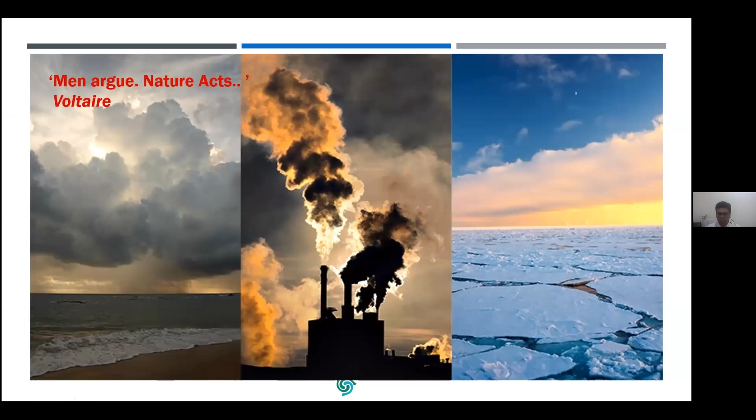But still, we are just discussing what kind of mitigation measures we should take. Individually or nationwide, separately, everyone is discussing this and proposing some action plan. But to mitigate these issues, we have to act together. We all know through different Conference of Parties like the Paris Agreement, or COP26 and COP27 last year, we are basically discussing globally what kind of mitigation measures we should have.

As displayed over here, we are facing many different issues like water scarcity and drought situations. And among them, waste management is also one of the major issues which we are facing right now.

So just to give you a basic idea about the carbon footprint, because we are talking about net zero now, net zero carbon: overall, India's contribution to carbon emissions globally is around 7.5%, which is a significant amount, and it is continuously increasing. So we have to act towards it.

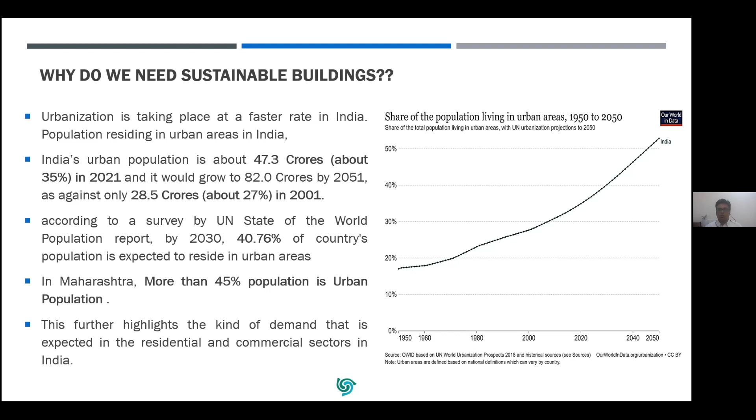The way population is growing, the way migration is happening from rural to urban areas, obviously we have to meet all the aspirations, meet the lifestyle standards, mitigate poverty, create employment, but at the same time it should be responsible. So even city growth or new buildings should be responsible.

Again, when we talk about buildings, many times we think of buildings in isolation, as very small buildings. Typically what happens is most stakeholders argue that we don't have a huge impact on the environment, or we are not creating a huge amount of waste or pollution. But with the sheer volume of the number of buildings and the population residing in them, and projects like commercial, different types of commercial, institutional, healthcare, or many different typologies of buildings, in volume the impact is huge.

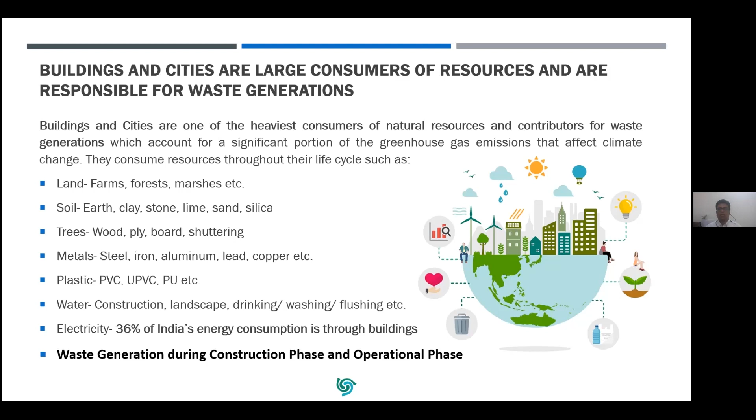So buildings are basically continuously consuming resources. They are depleting resources during the construction phase and during the operation phase also. They consume land, they consume different types of materials like metals, soils, plastics, you name it - every material any building is consuming. At the same time, during construction and post-occupancy, in the operational phase, it is continuously using or consuming resources like water and electricity. During construction and operation, it is also creating a huge amount of waste, which is actually today's point of discussion. So we have to consider waste generation during both the construction phase and the operational phase.

As per the CPCB report, every year they present a report about what kind of waste India generates. As per CPCB 2020-21, the total quantity of solid waste generated in the country is somewhere around 1,60,000 tons per day, out of which 1,52,000 tons per day is being collected, which is an efficiency of 95%. But if you check the percent treated, only 50% is being treated, and almost 18% is going to the landfill. The gap is that 31% of the total waste generated remains unaccounted for. So we are only treating 50%, 18% is going anyway to the landfill, and 31% we don't know what is happening to that waste. It is a huge amount of municipal solid waste generated.

Also, most of the time what happens is we only talk about municipal solid waste generated. Obviously that is a major concern, but then we typically ignore the construction and demolition waste. The way the construction industry is growing, the way population is growing, and the requirement for houses and different types of buildings is growing, there is a huge increment in construction and demolition waste.

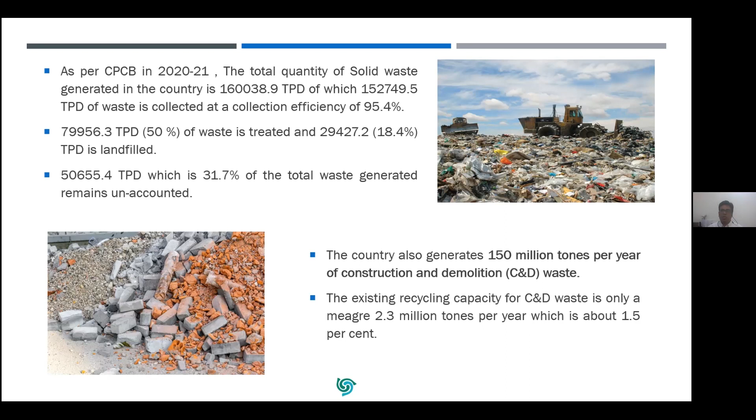There are a few research papers and other statistics available. The country generates almost 150 million tons per year of construction and demolition waste, and only about 1.5% - I'm considering this on the positive side, but as per many research papers it is only 0.5 to 1% - of the total construction and demolition waste generated is being treated or recycled. All the other waste is going to the landfills. It is polluting the farms, it is polluting the rivers, it is polluting the air and many other resources. So we need to think about this waste also.

Is there any existing legal framework related to waste management? Yes, there are many rules and regulations related to waste management. There's the Plastic Waste Management Rules from 2016. From the Environmental Protection Act or Air Act, there are rules related to waste management, but we also have different specific rules related to plastic, batteries, e-waste, hazardous waste. Even for construction and demolition waste, there are rules from 2016, and biomedical waste management. Now we even have rules regarding wastewater, how you should treat it.

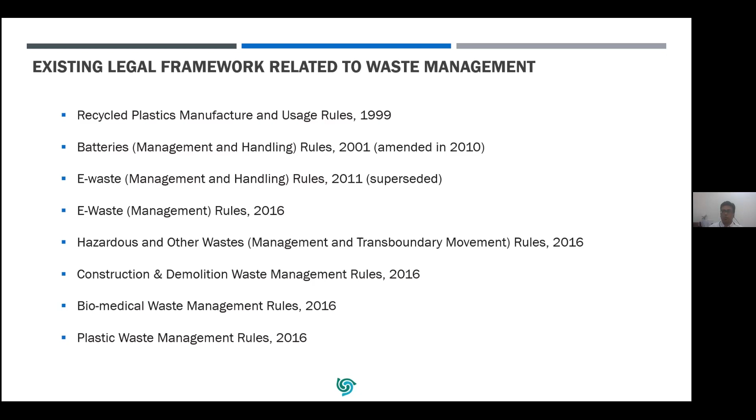So there are legal frameworks available, but the problem is with implementation and awareness. The existing legal framework is already there, but we have to implement it properly and monitor it properly. In this regard, green buildings play a major role.

So what is a green building? In simple language, a green building is one which uses less water and less energy. Green buildings don't say that you should compromise on your aspirations, or compromise on your thermal comfort, visual comfort, or other comfort conditions. But the building should be responsible enough to optimize energy usage, reduce water consumption, and conserve natural resources.

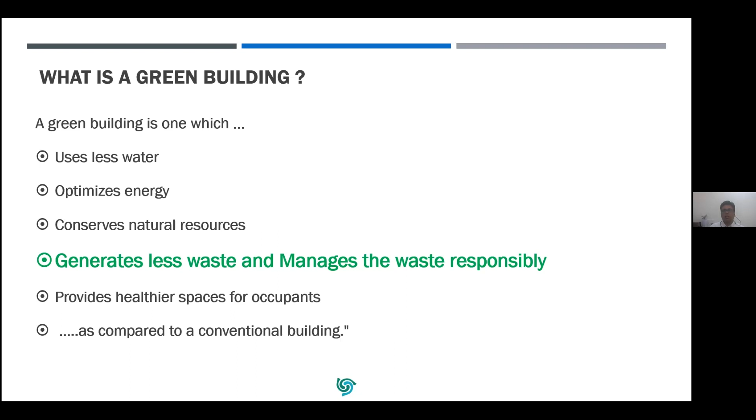During operation and maintenance, or even during construction, the building should generate less waste, and any waste generated should be managed responsibly. With all these aspects, we should provide healthier spaces for occupants. This is in comparison with conventional practices and some standards. There is benchmarking and standards available where you compare your buildings with these standards, proving and validating whether it is performing in the right way or not. That is what I'll basically define as a green building.

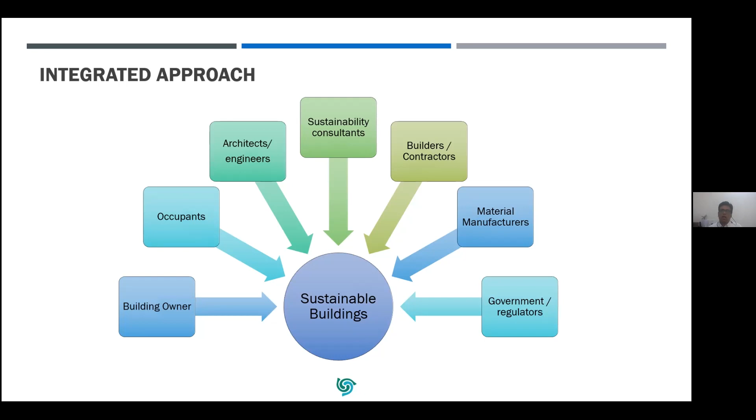In green buildings, this integrated approach is very important. Many times, all the designers or policy makers, or even waste management policies and protocols, everyone is sitting in silos, creating and targeting their own area of expertise. But if we don't have this integrated approach...

If I have to design a sustainable building or a sustainable practice for waste management, we have to consider building owners, occupants, then the architects, designers, engineering faculty who are designing the buildings or systems, then those who are going to construct these systems. So we have to consider builders, contractors, the way laborers are working, whether the materials and technologies available in this scenario are there or not, and then government and regulators. If everyone is on board and targeting these kinds of facilities or waste management practices, only then can a successful waste management practice be implemented.

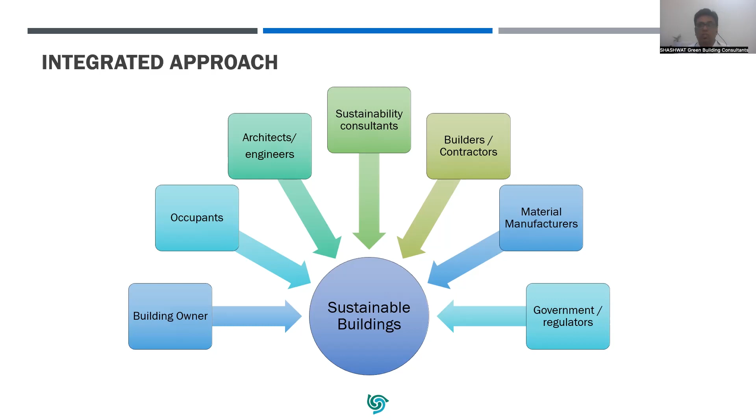So any sustainable building or system should follow an integrated approach and also a life cycle approach for waste management through buildings. When talking about buildings, many times we only think that after construction, waste generation will start, and then we only have to treat the solid waste, the municipal solid waste generated by the building, with some strategies related to it. But that is not true.

As we discussed, there is also a huge construction and demolition waste problem. So from the design phase, designers, architects, or other consultants designing the building, or even owners and contractors who are going to construct it, should think about these problems like waste generation. Then during the construction phase, we have to implement these protocols properly, select proper materials, select proper technologies. Only then can you reduce waste generation during construction.

Obviously, other systems like waste management systems during the operational phase have to be considered at the design stage itself. We have to consider, while designing, where the treatment for organic waste is going to happen, or how we are segregating it. If the designer doesn't think about segregation of waste in designing, and isn't allocating space for segregation or treatment, it is impossible to treat that kind of waste during operation and maintenance.

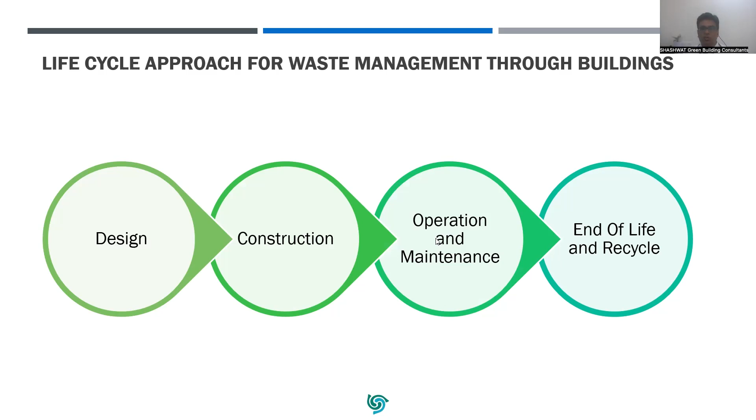So with this integrated design approach, at that stage they should think about how the facility is going to be managed, how the waste is going to be created, and what kind of technology, process, and protocols we are going to implement during operation and maintenance, and also at the end of life and recycling process. Most of the time we don't think about the end of life, what will happen to that building when it actually reaches the stage of end of life, and then the huge demolition waste and issues related to construction and demolition waste arise. So this kind of life cycle approach for waste management should be considered.

So I'm focusing on these four aspects right now: approaching solid waste management at the design stage, which is the first phase. I'll be discussing these four issues.

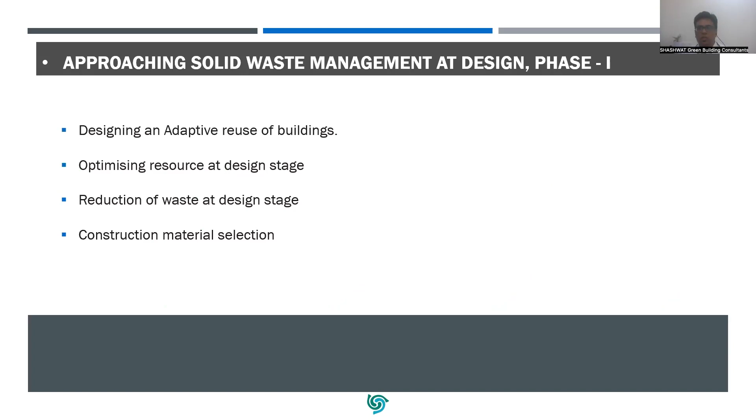So these are four solutions which we generally consider while designing or constructing green buildings. The first is very simple: adaptive reuse of buildings. Nowadays we have started discussing whether we can use old buildings instead of demolishing them totally, or use some part of the building where we can reuse those spaces with adaptive change.

This is a very interesting example where an existing factory shed is being converted to an office building. We just need to change the interiors of the project. Thus we are reducing demolition waste by avoiding demolishing the total factory building and constructing a new office building. Such practices can reduce the waste problem drastically, specifically construction and demolition waste.

So alternative use of existing buildings or existing spaces, or designing flexible spaces where we don't need multiple spaces for multiple activities, but can accommodate multiple activities in a single space by scheduling these activities at different times of day or different seasons. Such an approach will reduce the requirement for new construction and reduce demolition waste. This is how we can address such issues while designing.

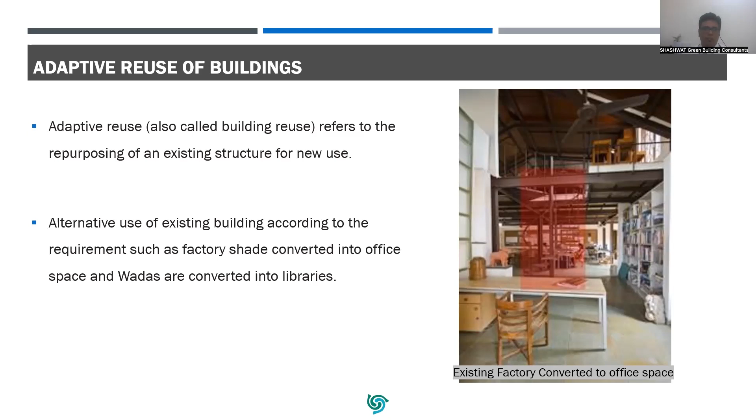Then the second solution would be optimizing resources with design. With simple standardized modular designs, we can use different materials and reduce the wastage during manufacturing, using technologies like prefabricated modules, prefabricated designs, or even innovative technologies now available like 3D printing, where huge waste generated during material manufacturing and construction can be avoided. Such practices can be used to reduce the construction waste generated during construction.

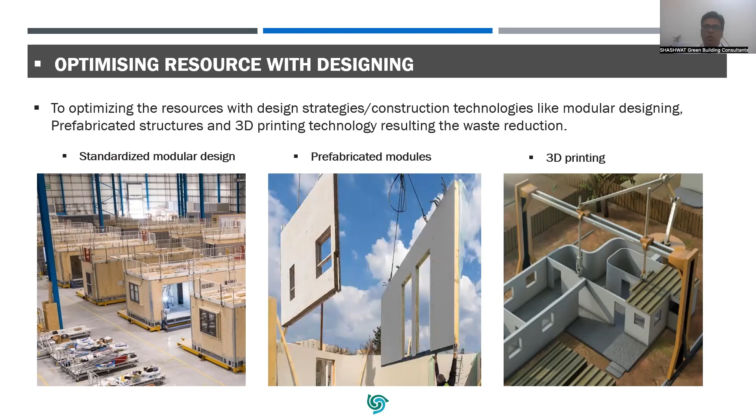But we have to think about this in the design phase itself. It cannot be that we have designed the building and then think about these technologies afterward - that will not happen. So at the design stage itself, we should think about this optimization of resources.

I'll give you some simple examples, like using salvage materials. We can reuse furniture which is salvage furniture, or even in industries, many times whole structural steel is salvaged and reused for construction of new factories or buildings. There you are reducing environmental impact by reusing that material, which otherwise would go to waste and require huge amounts of energy to mitigate that waste problem. So salvage materials, salvage furniture, salvage spaces can be reused, and we can reduce the waste.

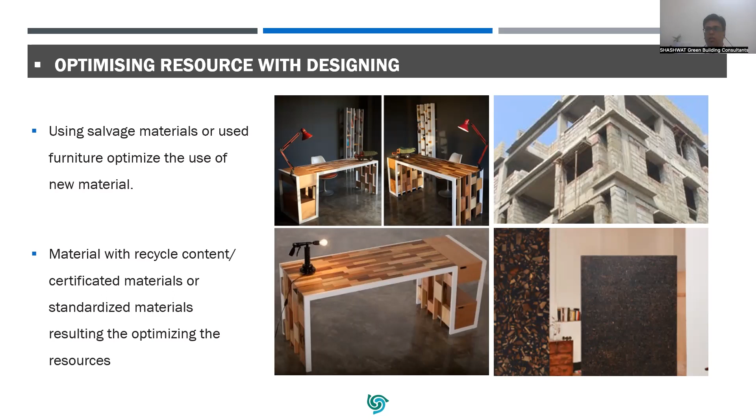Similarly, material selection is very critical while designing, as is thinking about dimensions. I'll give you the example of glass facades. We generally see a lot of buildings with glass facades nowadays with glass panels. When designing a glass panel, they need to think about the standardized size manufactured at a glass manufacturing factory, because if you design with any other dimension, it will increase the glass waste generated during construction. So even the designer should think about these issues - only then can we address issues related to waste generation during construction.

So use of prefabricated doors or windows with standardized dimensions - if we standardize some dimensions and mass manufacture or prefabricate such elements like doors, windows, wall panels, or different furniture, we can reduce these kinds of waste generation during construction drastically.

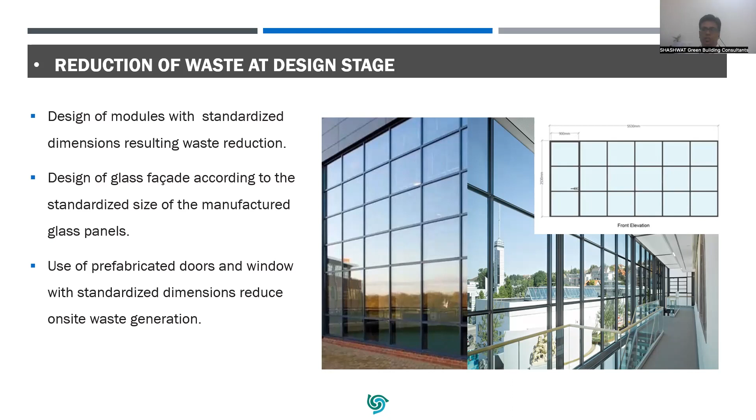Also, considering and selecting materials with recycled content - many times there is a notion that materials with recycled content are not good in quality, but this is not true. There are protocols and processes where you get material with recycled content at the same strength or quality, while reducing a huge amount of waste generated.

Post industrial is basically any waste generated by industry, manufacturing industry, and they are recycling that waste. I'll give you a simple example of steel manufacturing. Typically, steel plates are manufactured first, then sections, then re-rolled bars. All these steel bars we use for construction are typically re-rolled, and that re-rolling process recycles the waste generated in the manufacturing of steel plates. That kind of post-industrial waste is not affecting the strength of steel or the quality of steel.

So we should be open to accept those kind of materials where recycled content is being used for manufacturing. And in post-consumer waste, basically all the scrap we generally sell to scrap vendors, or many scrap vendors collect the scrap. So again, it is anyways going to be recycled. This post-consumer steel or post-consumer factor is also there in many materials. So we just need to be open and consider this during selection of material. We should be conscious to use material with recycled content. Then only the whole waste problem can be resolved.

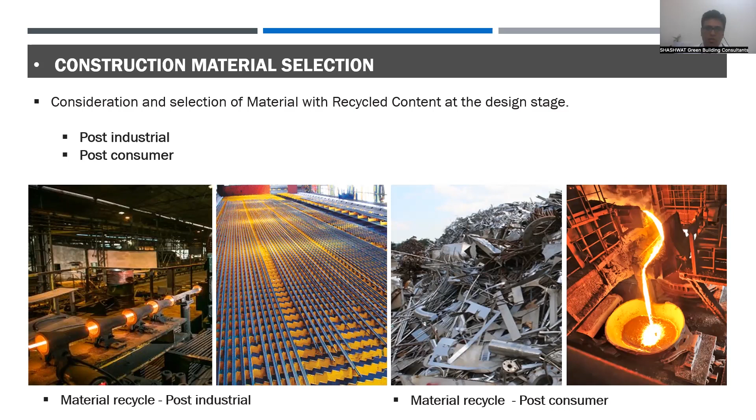Another simple example is cement, which is a huge contributor to GHG emissions and is resource intensive. It uses lime and other materials, and huge amounts of energy. Typically, instead of ordinary Portland cement, if we use Portland Pozzolana cement or PPC, it replaces cement in some percentage ranging from 15 to 30%. It replaces cement with fly ash. Fly ash is nothing but the waste material generated by thermal power plants where coal is burned to generate electricity, and the byproduct or waste is fly ash.

So again, without compromising on the strength or compressive strength, you can safely replace virgin material like cement by 20 to 30% with fly ash. It will not compromise on structural strength, but it will solve the huge issue of disposal of this fly ash. Similarly, ground granulated blast slag cement, or GGBS. Here again, while manufacturing steel, blast furnaces generate slag as waste, and there is a huge problem related to disposal of this waste material like fly ash and slag. So this is again being recycled and reused as a replacement to cement. These materials are easily available without any additional cost, but they are very environment friendly, and they reduce the problem related to disposal of waste.

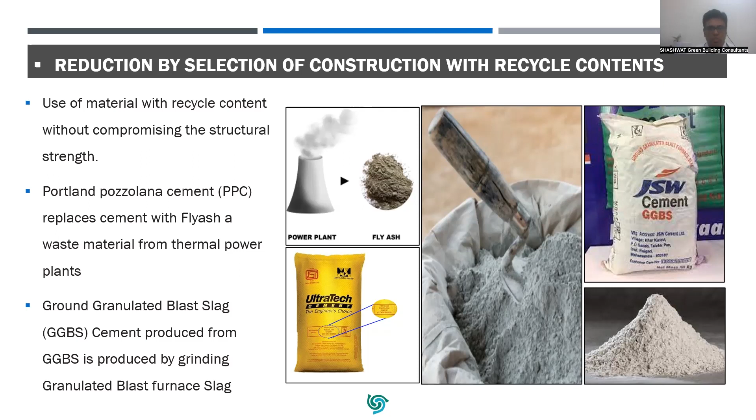Next is approaching solid waste management at the construction level. We discussed the design phase, how while designing we can consider waste and change practices. Similarly, approaching solid waste management at construction is basically the regular practice of reduction of waste, reuse, and recycle during the construction phase. That is how any waste problem should be targeted.

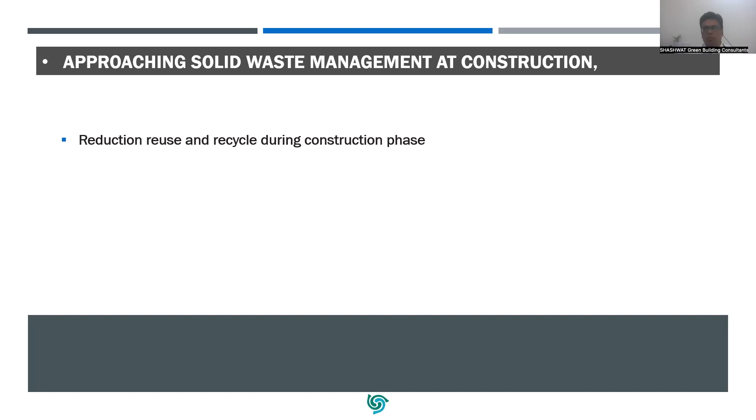So first should be reduced waste generation, on-site waste reduction. There is a huge amount of waste which is typically generated during the construction phase - steel scrap, different types of materials like block work, tile work, false ceiling, etc., which create waste. At the same time, there are many packaging materials like cardboards or wooden packaging material. If we select proper technology and proper practices, we can reduce the waste generation. I'll give you a simple example.

There are machineries and technologies available for steel bar bending, where you have coils of steel bars and they cut precise lengths of steel. With that, you are reducing huge amounts of steel scrap, or these days they use couplers for steel bars. That can reduce huge amounts of steel waste generated during construction. Or there's technology like MIVAN construction where you use the same formwork, multiplying and reusing it at each different floor. This is how you reduce material wastage during centering, which typically happens with plywood and steel sections. Such selection of materials and technologies can reduce huge amounts of waste during construction on site.

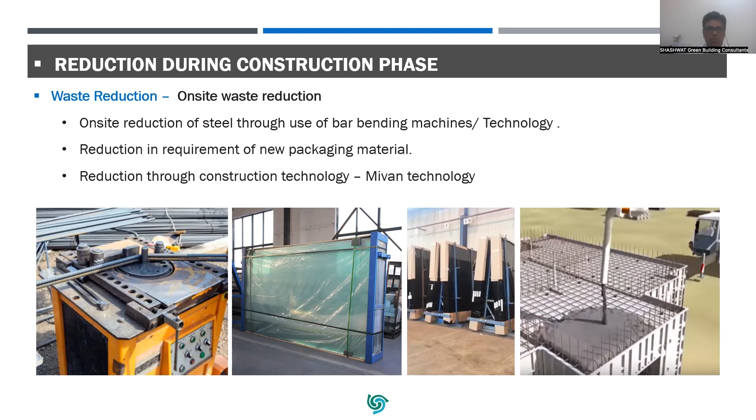Then the second option should be reuse or recycle.

Mentality is there to reuse such kind of waste, but it should be a conscious decision, and first we need to segregate that waste properly. So in green buildings we typically focus on this construction waste management protocol, where each different type of material waste generated on site shall be properly segregated, and then we should identify strategy to reuse or recycle it.

Reuse examples: brick blocks or AAC blocks can be reused for waterproofing works or backfilling work. Reuse of concrete for walkways, internal site roads, or even nowadays plastic is being reused for internal site roads or road construction. Reuse of steel on site - steel bars can be reused for temporary structures, or welded properly and used for smaller sections. Such kind of reuse practices can be implemented on site.

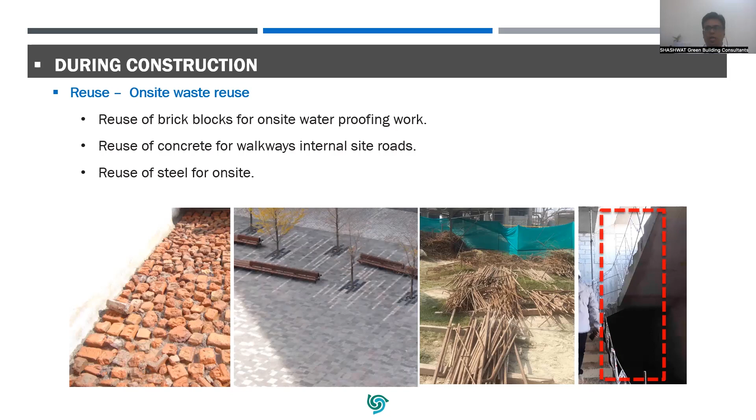And then obviously recycle. Any material which cannot be reused on site will be sent to the recycler. We need to identify at the construction site who are the recyclers available in the near vicinity and what kind of materials generated on site can be sent to them. Typically steel waste, paint cans, empty gunny bags, or even cardboard and packaging material like plastic can be sent to the recyclers, and proper protocol can be implemented - what kind of material will go to what kind of recycler, how they are recycling it. With all this proper implementation, we can reduce the huge problem of waste generated, specifically construction waste generated in buildings.

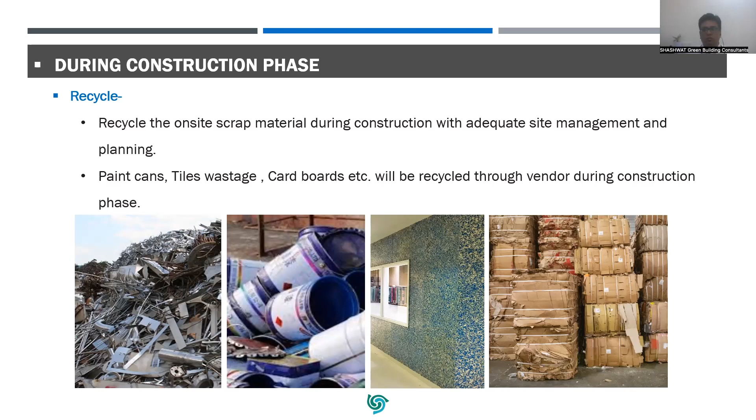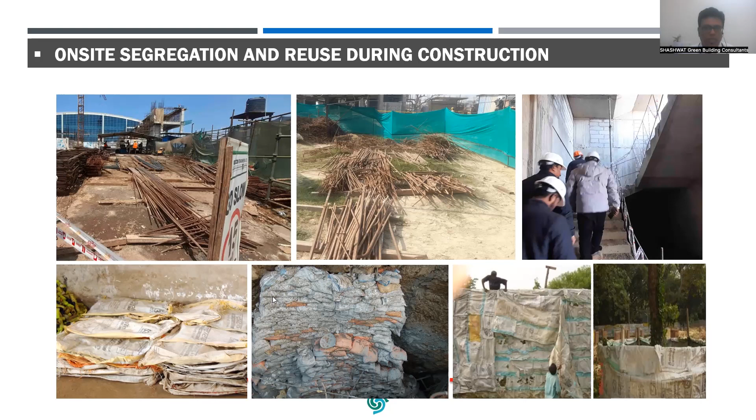So there are some on-site segregation and reuse examples during construction. Here you can see even empty gunny bags can be reused for sand filling, or even for barricading, where we generally use green nets, but in one of the sites they used these empty gunny bags - they created screens with those gunny bags, and they are being reused. Such kind of innovative adoption of waste management practices can be implemented, it's not technology, but innovation.

Now, while selection of material, this cradle to cradle approach is being focused by green building rating systems, and the overall green community. Because earlier we used to talk about only manufacturing process and construction process, but what will happen at end of life - what will happen to that particular product or material at end of life, and during operation what will be the maintenance and refurbishing or refurbishment requirement.

So this end of life stage is now being discussed for each and every material - how that material is going to be demolished, what kind of waste it will generate during demolition, how that waste is going to be processed, whether it can be reused or recycled, and otherwise what will happen with the disposal methodology. So now in green buildings we are totally focusing on the cradle to cradle approach, not cradle to gate or cradle to grave approach.

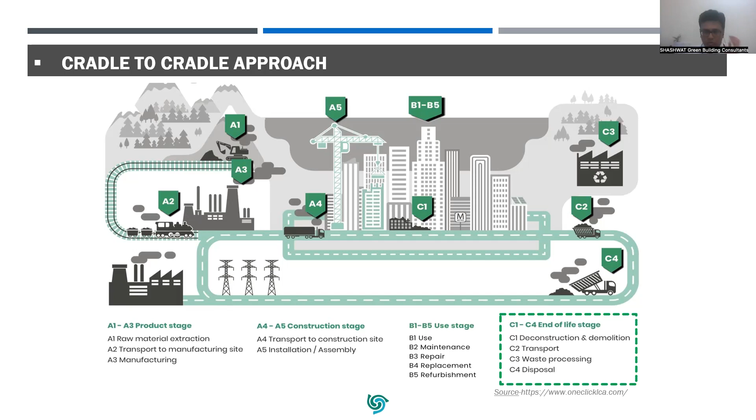These are the different stages we typically say - product stage, construction process stage, usage stage, and now we are talking about even end of life stage, where we are talking about deconstruction or demolition, what kind of practices will be there, transport of waste, processing for reuse, recovery, and/or recycling, and then disposal stage. For me, this kind of approach will actually target waste generation during the whole life cycle of the project or the whole life cycle of the material also.

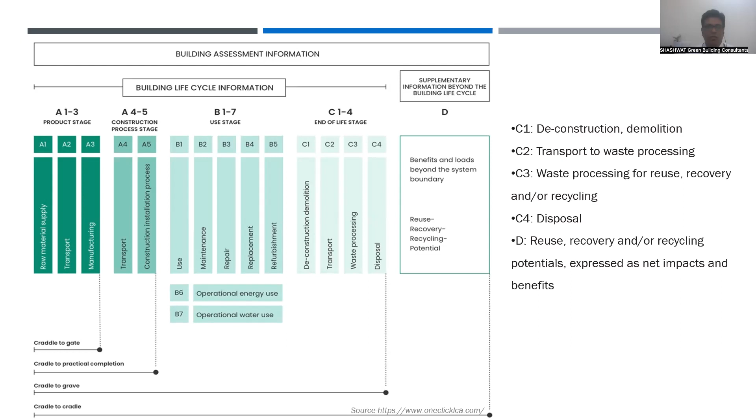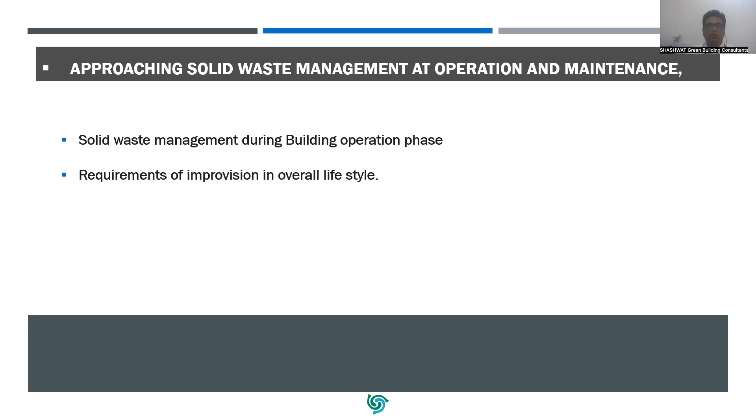This could be a really right way to look at the waste problem caused by buildings. Now, operation and maintenance - approaching solid waste management at operation and maintenance, solid waste management during building operation phase, and then requirements of improvision in overall lifestyle.

So in the building operation phase, what we have realized is there is a lack of awareness and lack of facilities available in the buildings. We all know that we need to segregate biodegradable and non-degradable waste, but if we don't give the proper facility, like proper dustbins or bins where we can segregate biodegradable and non-degradable waste, and again there is a lack of awareness and education - what is biodegradable, what can go to that green bin, and what should go to that blue bin or other bin where we are collecting non-biodegradable waste.

So that is a major problem we are facing in residential societies or buildings. Proper awareness campaigns should be there, we should give proper guidelines, we should provide proper tenant guidelines at the time of occupancy, and we should give proper sessions to sensitize these users or occupants. Then actually these practices can be implemented on site.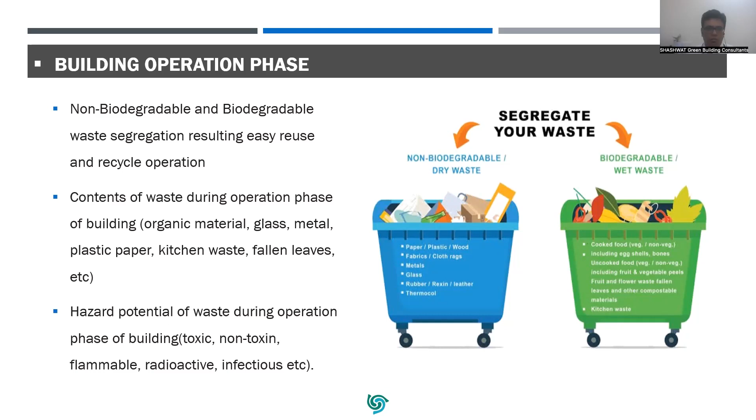Proper segregation is key to waste management, because if we intermingle all the waste generated on site during operation, like biodegradable and non-degradable, then even if projects have systems to treat that kind of waste, they won't be able to actually practice or treat the waste which is mixed - for example, if we have a biodegradable waste treatment plant, we cannot use it if the waste is mixed with non-degradable. So that kind of sensitization should be there.

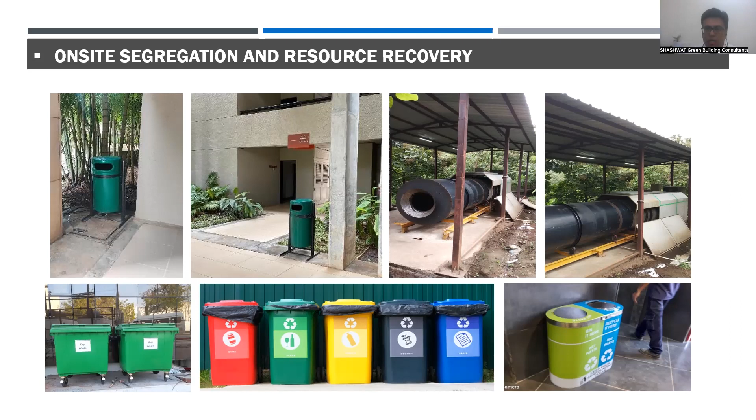Also, what I feel is when we educate the occupant why it is important and how it is going to benefit them. In many projects, they have these organic waste composters or biogas facilities, but because of lack of knowledge and awareness of how these systems help them, most of the time they don't use those systems, because occupants feel it is additional cost or effort to maintain them. So if we give proper benefits, financial benefits, and if the government provides subsidies or incentives, these kind of systems can definitely be implemented and maintained by occupants.

Typical technologies buildings use to treat biodegradable waste are biogas or composting machines, even automatic organic composting machines. Vermicomposting pits are a very famous kind of system which earlier many societies were having. Obviously, there are issues related to maintenance of these systems, so training proper maintenance staff or appointing them is a key issue where we need to act.

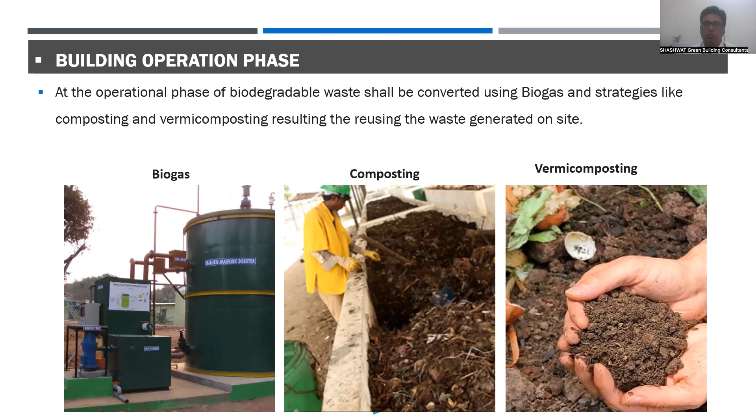Then even liquid waste - we all talk about solid waste, but a huge amount of wastewater is being generated by buildings. Now, even in 2021, we have a new rule where facilities or residential societies with certain numbers of dwelling units need to treat their wastewater on site. Different technologies like waste treatment plants, STPs, different typologies of STPs are available. Instead of a centralized sewage treatment plant, if we decentralize these systems at society level, they can be operated efficiently, treat that wastewater properly, and then this wastewater can be reused for flushing, for irrigation, reducing demand on potable water or infrastructure for potable water.

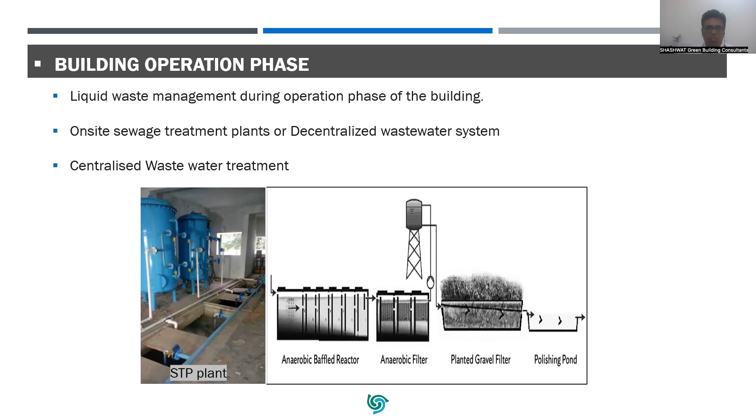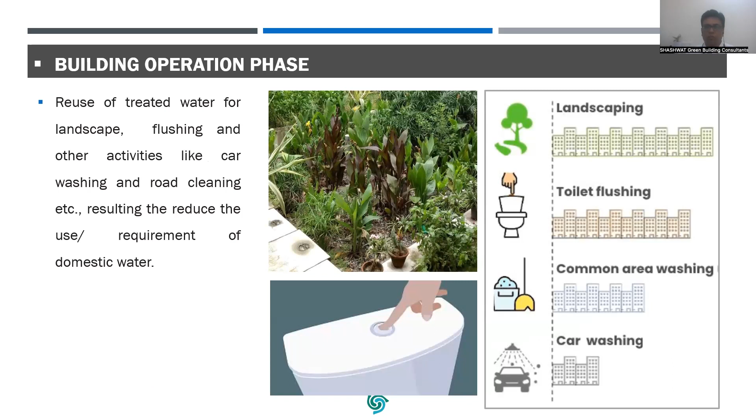This should be encouraged, and most green buildings are basically implementing these practices and dealing with the problem of liquid waste generated by projects. Different reuses like landscaping, toilet flushing, car washing, or even common area washing - this kind of treated water can be reused, and then you can reduce your demand for potable water.

The requirement of overall lifestyle change basically starts with the sensitization of occupants. We need to start educating young people, students, make them aware about these issues, and then we can definitely act together and mitigate this issue of waste.

So we need to create a system and framework for these kinds of trainings and sensitization. Then decentralization of solid waste management is very important. What happens typically is if my society's waste is being picked up by a centralized system, my society will never think about treating the waste on site.

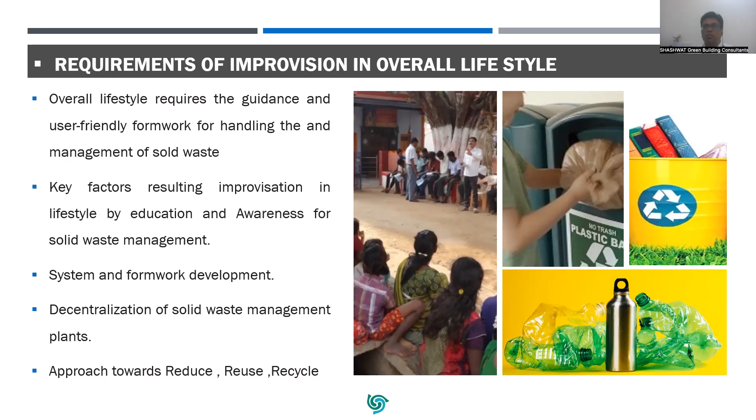So we need to push residential societies. Government and regulators should push residential societies or waste generators to segregate their waste, to treat their waste, and then only we can proceed. Otherwise, centralized systems most of the time fail because a huge volume would be there. Segregation is a critical issue, and segregation at source is the actual solution or easy way to deal with the waste problem. So this is very important.

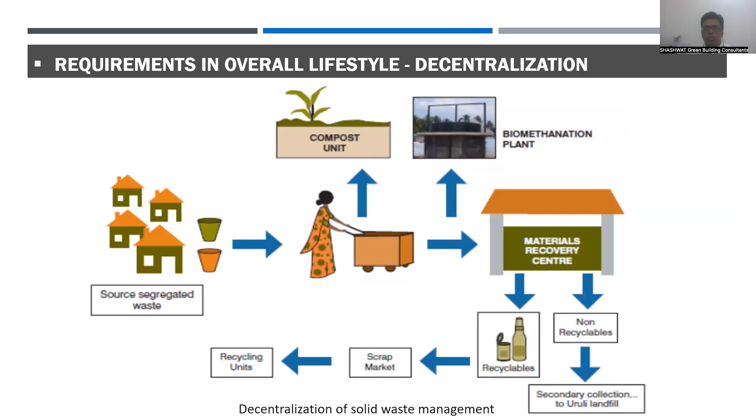Overall lifestyle, we need to sensitize occupants and building users regarding waste issues. For community engagement, we have a very interesting organization here in Pune, which is Swachh - an organization of waste collectors - who also provide solutions like maintaining your organic waste plants at the society level, through community engagement. They are implementing all these waste treatment practices on ground.

We have a very interesting financial assistance scheme here in Pune Municipal Corporation, where if you are treating your organic waste on site, along with two other green measures like rainwater harvesting and solar hot water or solar electricity generation, they give subsidies and discounts on property tax.

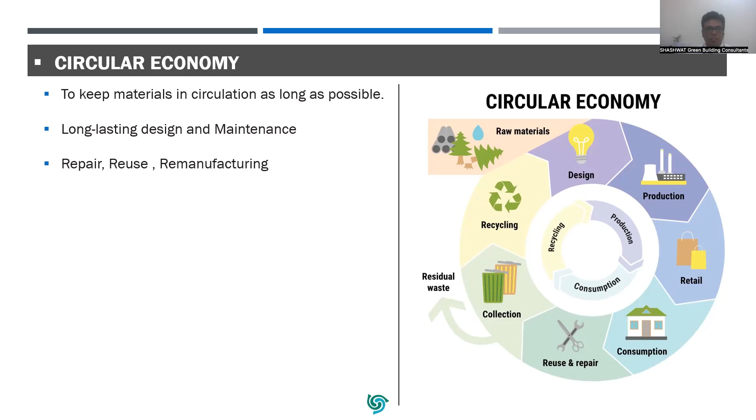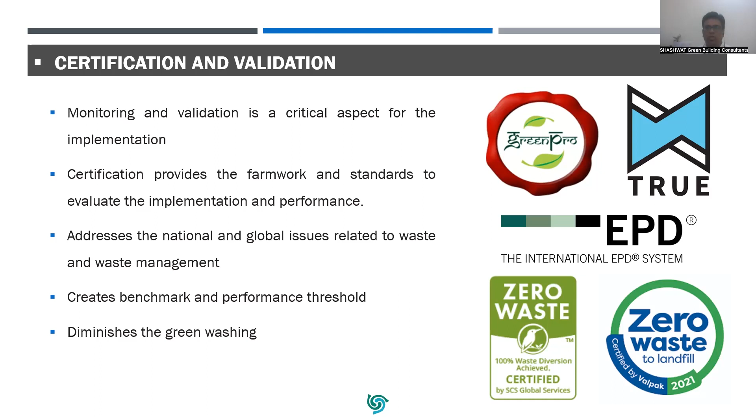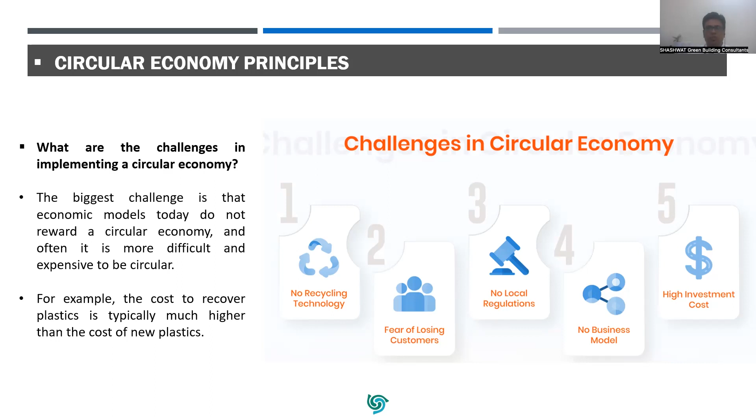Again, no business model. There are many plants, like waste management plants or e-waste management plants, where they are not profitable, and then they don't get subsidies or incentives, and the whole business model fails. Also, many times these treatment machineries or technologies are not cost effective. These are a few of the challenges we feel in overall circular economy or waste reduction.

Yeah, so that's it from my side. Thank you. So you spoke about different materials, the recycled materials which would be used in manufacturing and construction of the building.

How cost effective is that option? Because the general idea is that, as you mentioned already, the recycled products don't have the same standards as the new materials. And the other question is, is it really worth going for recycled materials? Sometimes they might be higher in price or market value.

Most of these materials are at par with conventional material in terms of prices. Many times, actually, they are cheaper. If I give you the example of cement, we discussed OPC, that is without fly ash mixing, and then we have PPC. Government is pushing the cement industry to use fly ash as a substitute to cement, in some percentage. So actually PPC, which has fly ash, is cheaper than OPC.